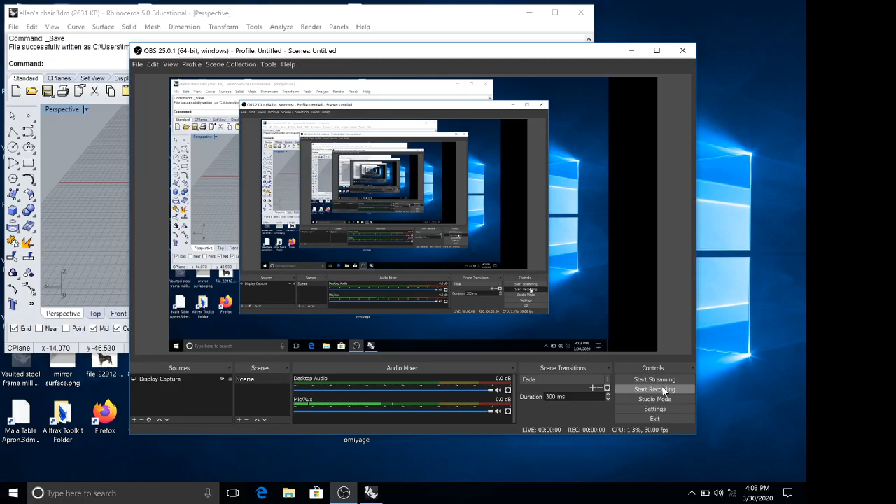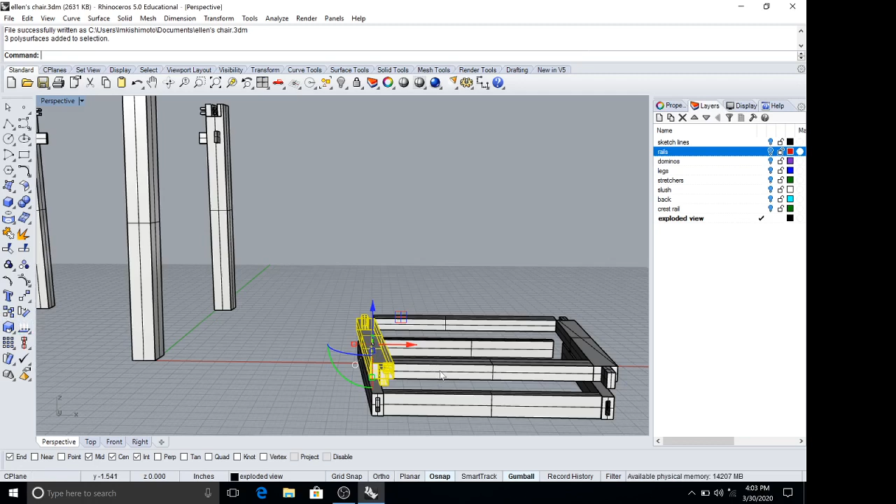Okay, so that last command, the set point command, actually crashed the program and I had to restart my computer. So I'm not going to use that command anymore. I'm just going to lay everything out manually. So I can start with rails. And I'm just going to bring everything to the 0 plane.

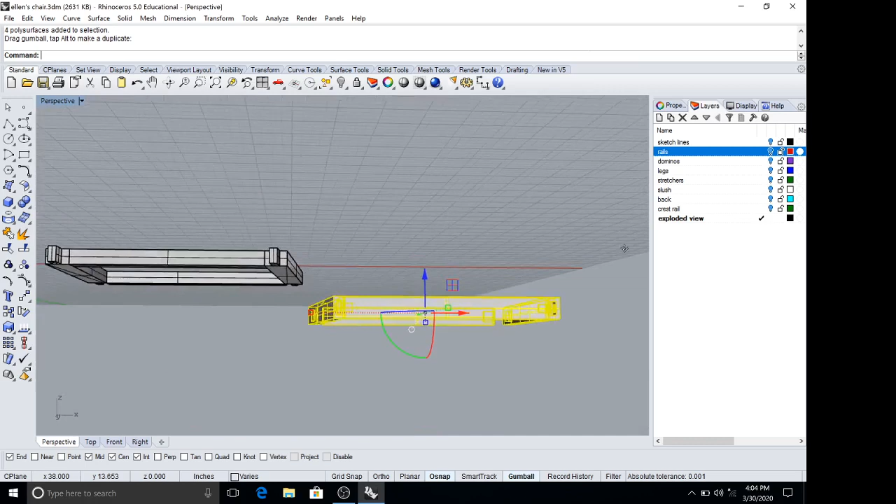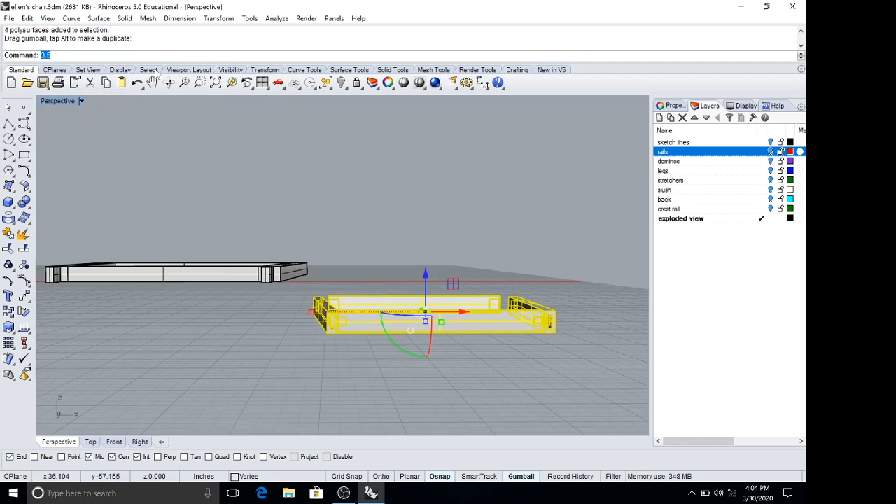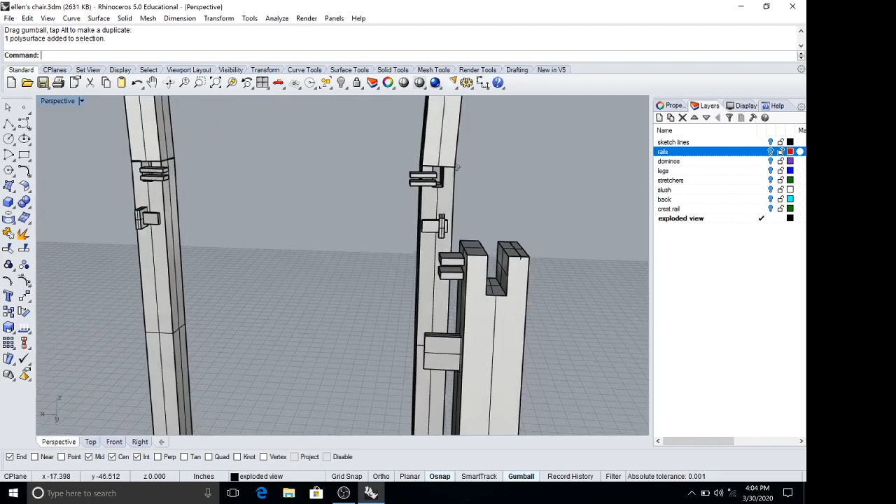I believe this was 1.5 plus 2, 3.5. I'm just laying my chair out flat. My dominoes aren't actually terribly useful besides creating mortises, so I might get rid of those, since those are all fabricated to the exact same size.

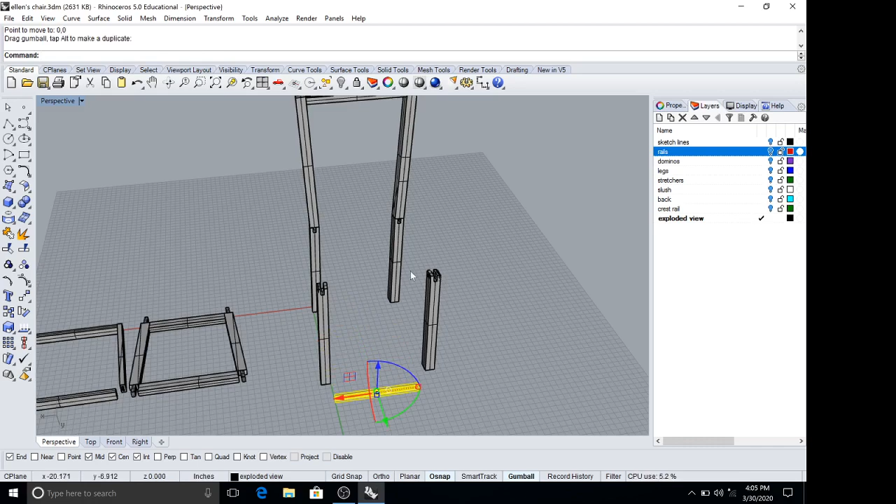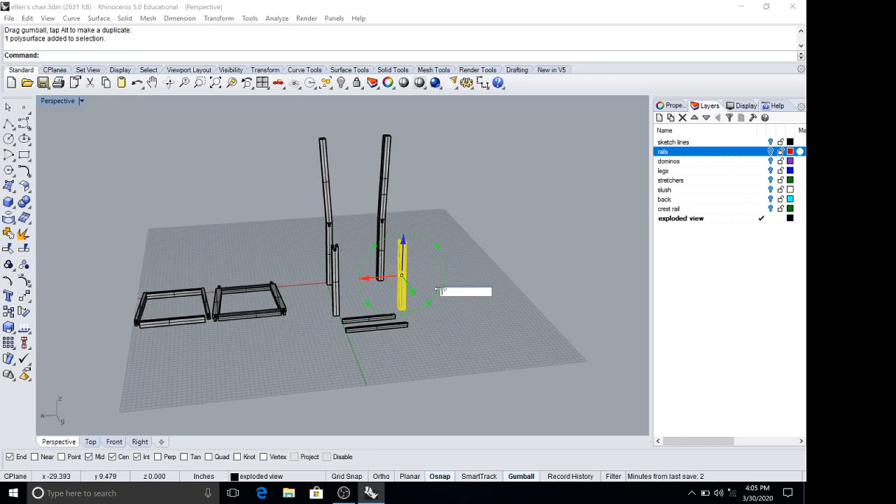These guys I can rotate flat. And I could delete some of these redundant parts. I like to keep them around just because then I know that I definitely need 2 of something in terms of machine setup.

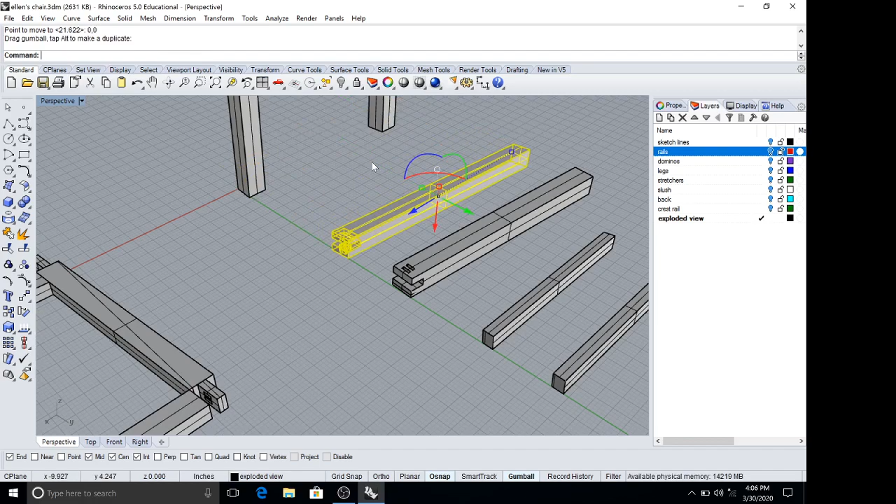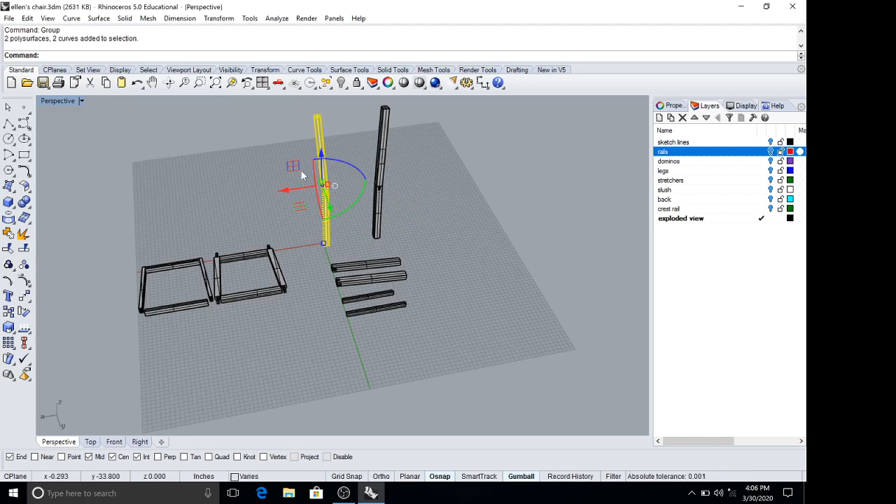And this might not be the most efficient way to do it. Like I said, I'm not nearly as comfortable with Rhino as Colleen is, but this way has worked pretty well for me. And I'm going to group these pieces together since they will eventually be a solid component. I could always ungroup them if I need to take measurements.

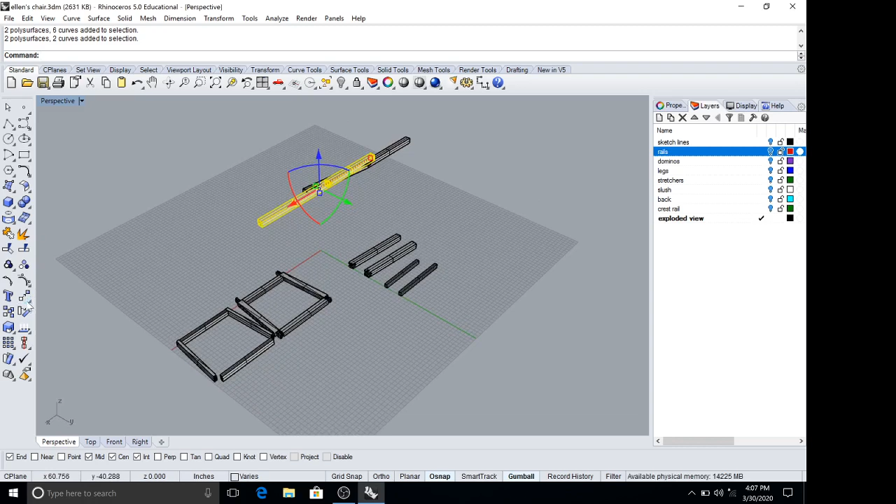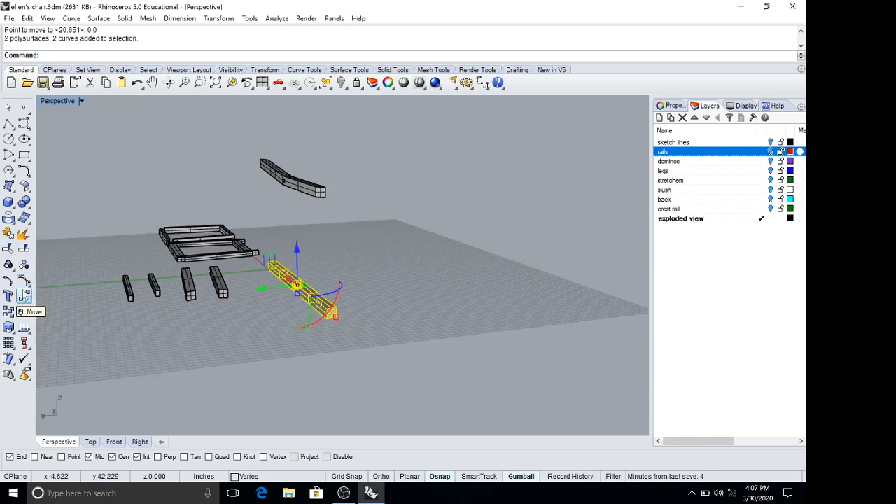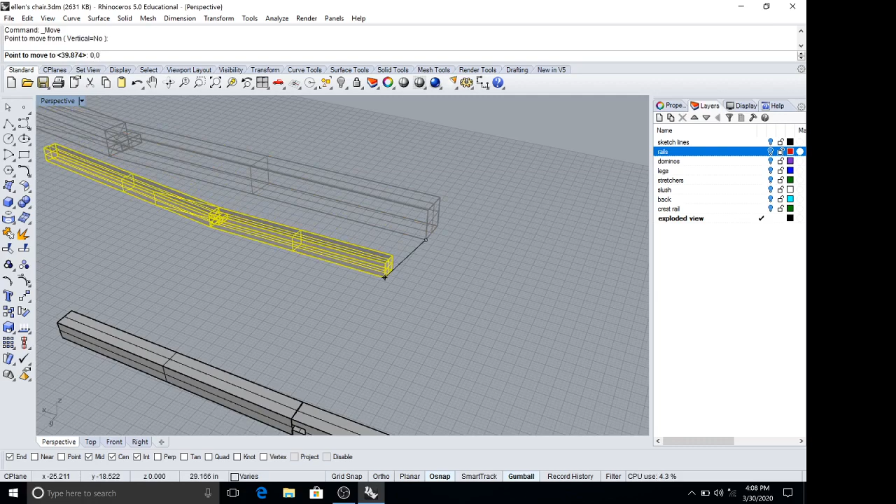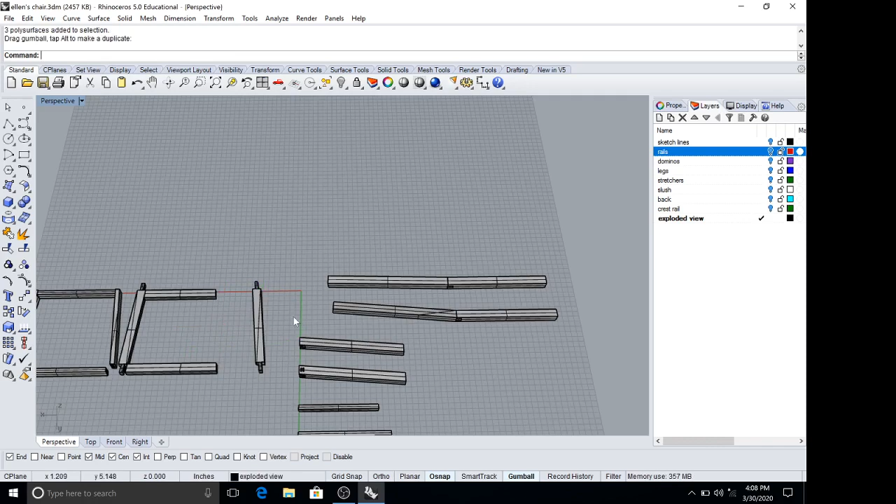And this one, I think I'll probably just put the leg at the 0 plane. And I could take it apart and straighten it if I need to really look at it. So one leg pointing one way, one leg pointing the other way. I still have my intact chair on another layer. And now I can just start to take some dimensions. So this guy doesn't need to be at an angle anymore, so I might just rotate that flat.

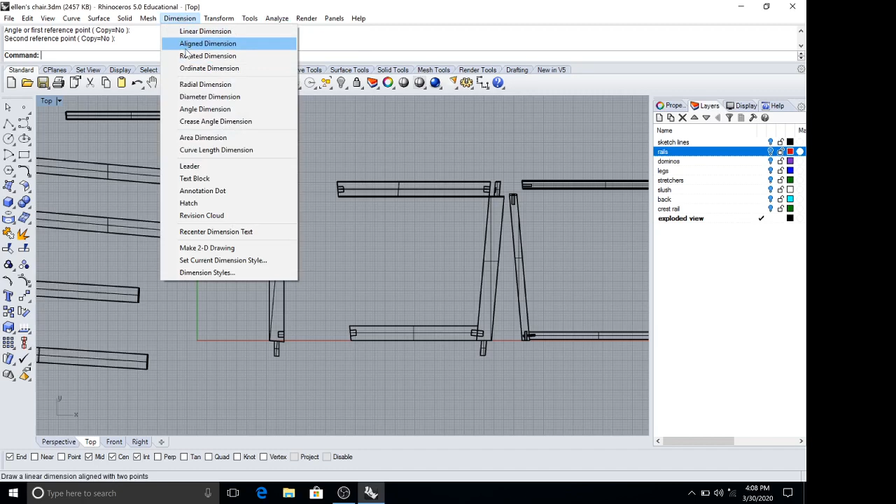And for dimensions, you can either do a linear dimension, which means it follows the orthographic lines, or you can do an aligned dimension for something that's outside of the orthographic line. So a good aligned dimension would be this shoulder. I can also play with my dimension styles. So if I go into dimension styles, if I'm in the inch decimal, I probably want to be in the inch fractional. Oops.

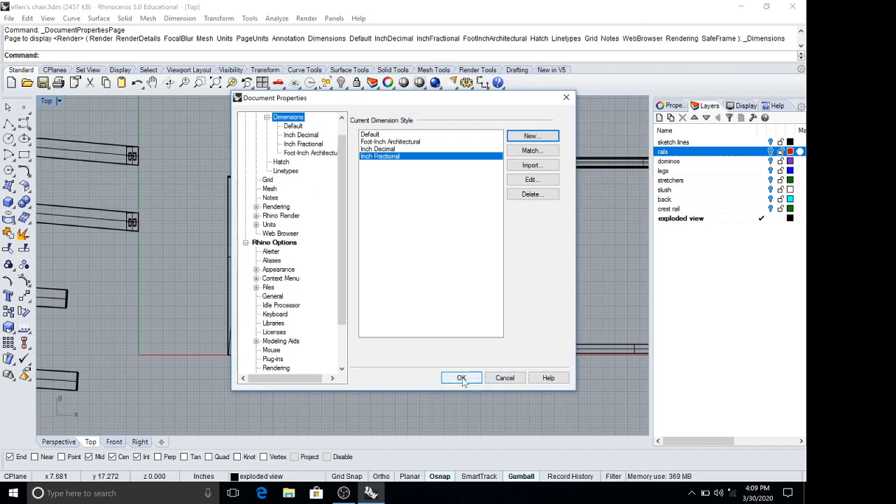Now it's 1.5, and I can even alter this dimension style. So if I say set current dimension, keep clicking on dimension styles, if I double click on this guy, I can change the size of the font, I can change the degree of precision that I want. So 16th is pretty good. I can change the precision for the angles, that might be important.

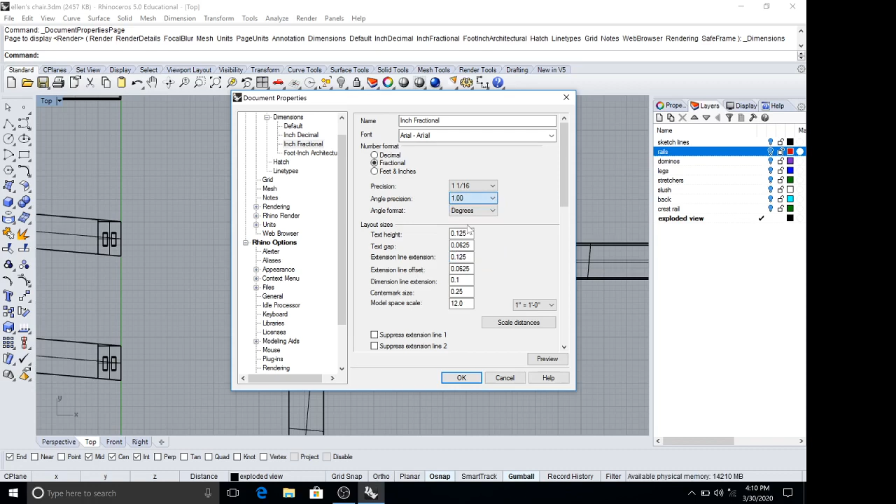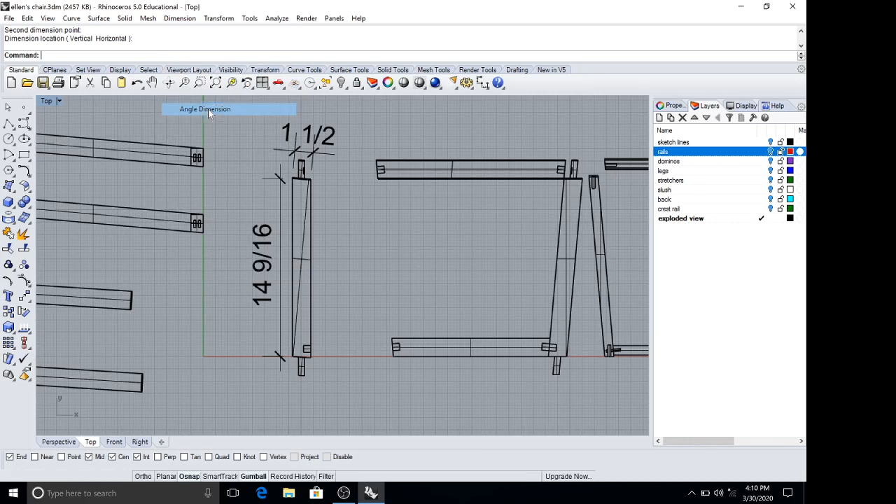Anything that's aligned with the orthographic lines, I could just use the linear dimension. If I want to measure an angle, hit angle dimension. And that's 85, so that's going to be pretty consistent since almost everything on this chair was 5 degrees.

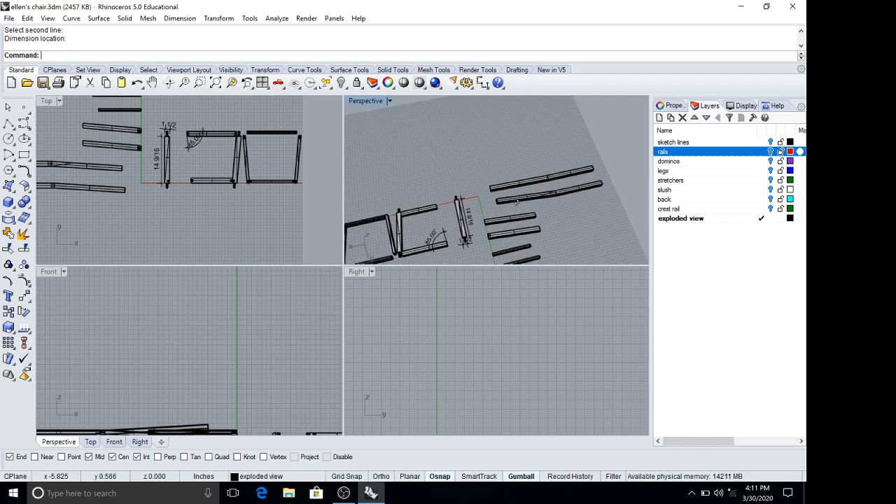So you could see that I could either print out a full-scale drawing of this, or I could just take all my relevant dimensions that I need. I could start to model jigs or sleds or templates or something that I need as well. And this can just be my master blueprint for my chair. So hopefully that's helpful for everyone. Sorry that it dragged on for so long.